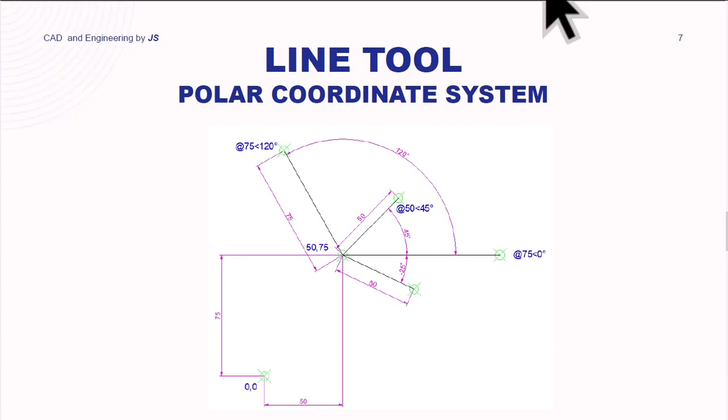Today we're going to review the line tool in AutoCAD, but instead of using Cartesian coordinates, we're going to use polar coordinates. The polar coordinates in AutoCAD are a way to specify a point by its distance from the reference point and its angle from a reference direction. The reference point is usually the origin, but it can be any other point in the drawing. The angle is measured in degrees counterclockwise from the positive x-axis.

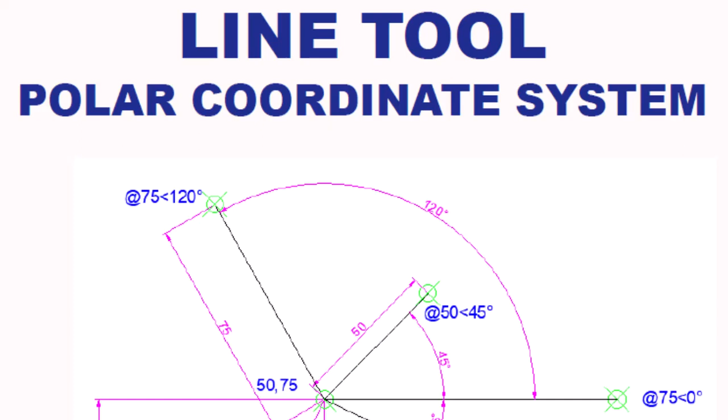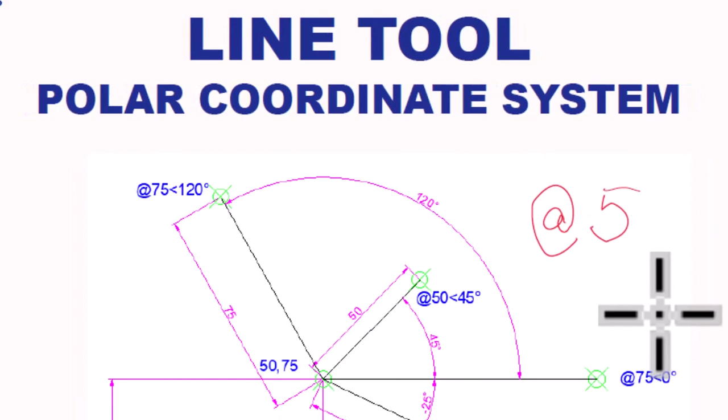To specify a point in polar coordinates, you type in the distance followed by the angle. Before the distance, you use the @ symbol, and before the angle, you use the less than symbol. For example, to specify a point that is 50 units from the previous point at 45 degrees counterclockwise from the positive x-axis, you would type @50<45, like is shown here.

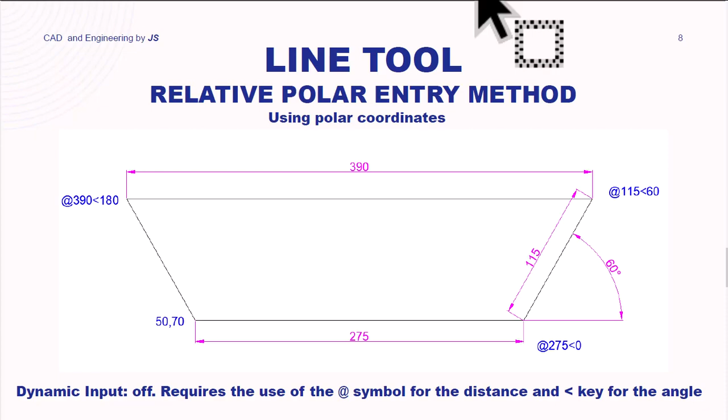Let's start AutoCAD and draw the outlines shown on the screen to practice using relative polar coordinates with the line command. I started a new drawing using the metric template. Let's make sure that we have the dynamic input off, and let's start the line command. I'm going to type in L and press enter, and we're going to specify the first point, which is 50,70. This first point is specified using absolute coordinates.

As you can see, I'm not using the right layer to draw my line, so I'm going to change the layer, but before I have to press escape to finish the line command. We're going to use the object layer, and now we're ready to start again. I'm going to click on the line command icon and specify the first point, which is 50,70, and press enter. The next point is at 275 millimeters from the first point and is a horizontal line,

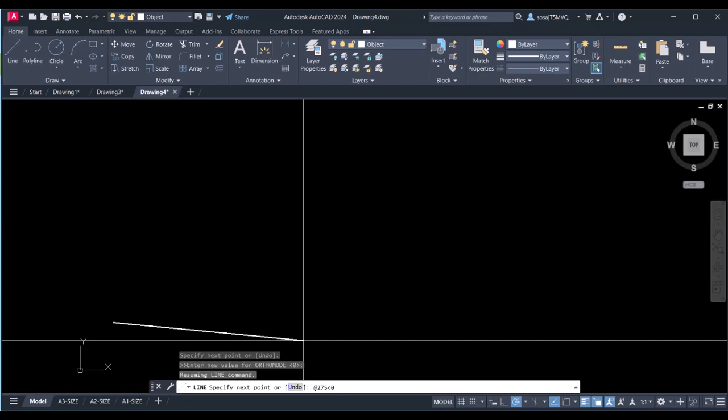so the angle is 0. So I'm going to input that information, @275 and the angle is 0. I press enter and we have our first line, which is a horizontal line. The next line has a length of 115 millimeters and the angle is 60. So let's input @115 with the angle of 60 degrees.

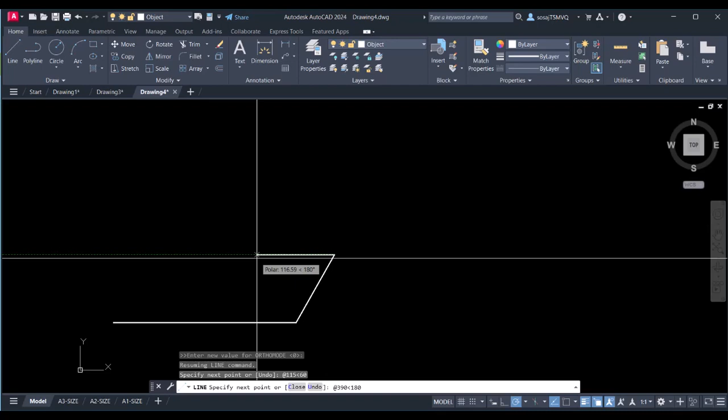Our next point has coordinates 390 for the length and the angle 180, and the reason is we're going now in the opposite direction of the positive direction of the x-axis. So when you measure the angle, you start in the positive direction. That's why the angle has to be 180 degrees. Press enter, and now we can just type in C to close the outline or click on close.

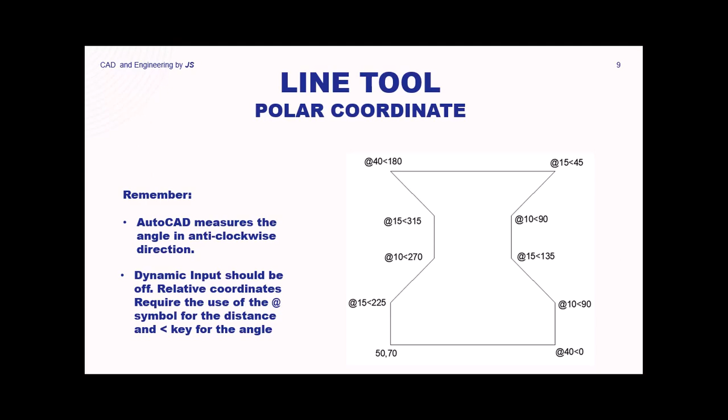I hope you find this video useful, and I leave you here with an example for you to practice using relative coordinates in AutoCAD to draw lines. In our next video, we're going to review how to draw lines using the direct entry method. Thank you.